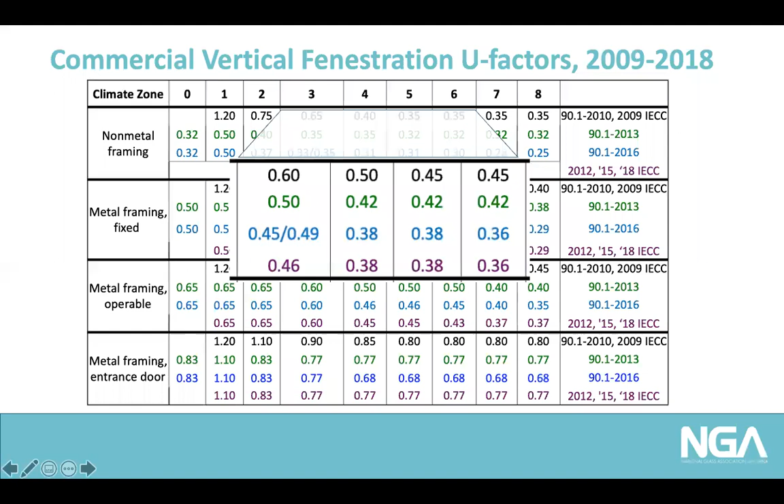And you can see as you go from older to newer, you see a steady increase in stringency, in this case, lowering of U-factors. Not a big surprise. We all know that's happening. And we see that in the real market. As the codes advance and then are adopted by the states, the market adjusts too.

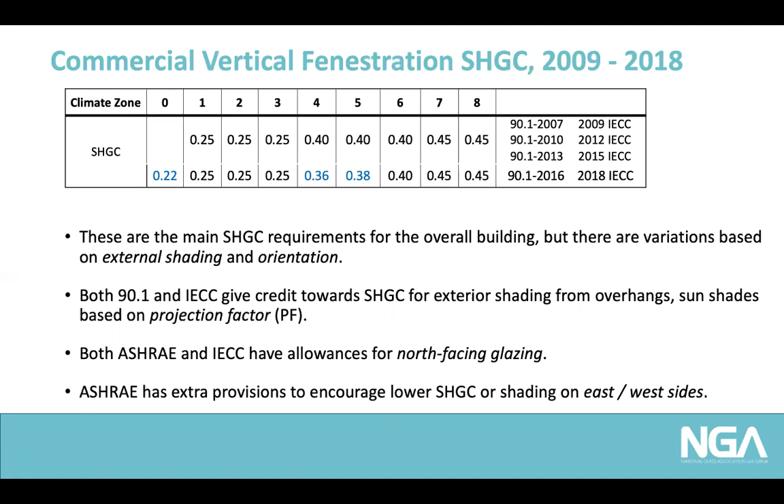Now, in contrast to that, the solar heat gain has stayed pretty consistent. You can see there it's always been at 0.25 in the south, and then higher solar heat gain in the central and north. There were some small revisions made in the center of the country, but really nothing too significant. So solar heat gain has been fairly stable over the last 10 years, and in fact even going back before that. A few new changes coming up on that, which I'll talk about in a minute.

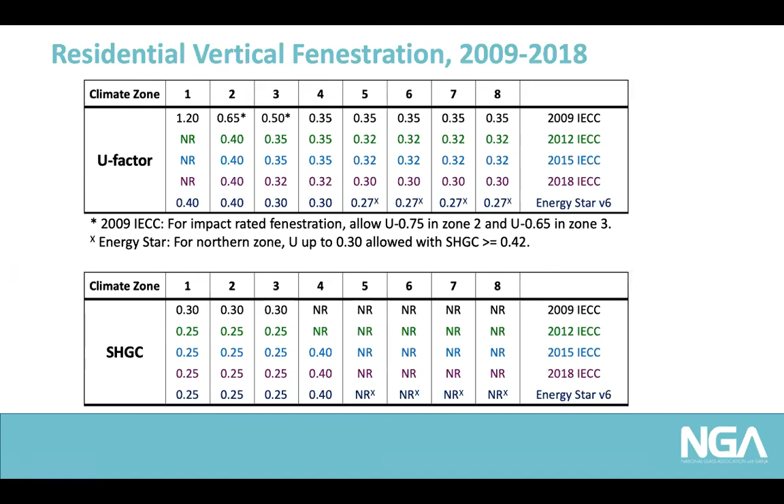That's today's codes. Where I spend the bulk of my time and where I represent the industry and you guys is looking at future codes. What's coming down the road? What are we working on? What's being adopted? And then what'll hit the road 5 years, 10 years from now. I've talked at length before about ASHRAE 90.1. The 2019 version is pretty much done. All the content is done. And it will be published in early October.

And then what is a little new is the 2021 IECC. Even though it's 2021, we're working on it this year. And so we went through the first public hearing this spring, where we went through 11 long days reviewing hundreds and hundreds of proposals, debating and then approving and disapproving and so forth. The next public hearing will be in October, and then there's a final online vote of all the building code officials in the November, December timeframe.

And I'll talk a little bit more detail, but in general, what came out of the IECC preliminary hearing results: the biggest item, which I'll show in a minute, is there was unanimous approval to align the commercial fenestration requirements between the IECC and ASHRAE 90.1. And likewise, the committee disapproved other proposals that went beyond that, or there were some bad proposals like unrealistically applying residential window U-factors to all commercial windows, regardless of structural performance or application. All those got shot down. So really we're trying to align 90.1 with IECC, which is a good thing from an implementation standpoint.

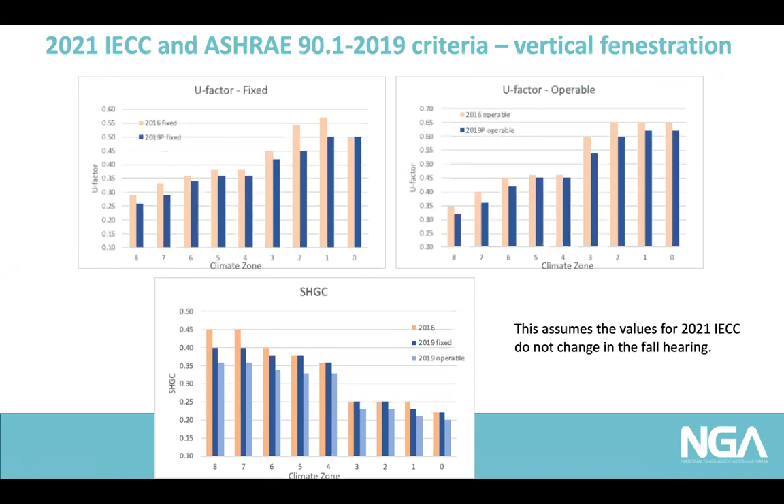And then one thing again with this alignment, and part of a big compromise deal, was that 90.1 and IECC would use the same product categories without regard to frame material type. So this just visually shows you the U-factors and solar heat gain, where you kind of see this next notch in performance in terms of U-factor, and you'll have all these details later when we make the slides available. It's not a huge leap, but a significant and steady incremental improvement in all zones.

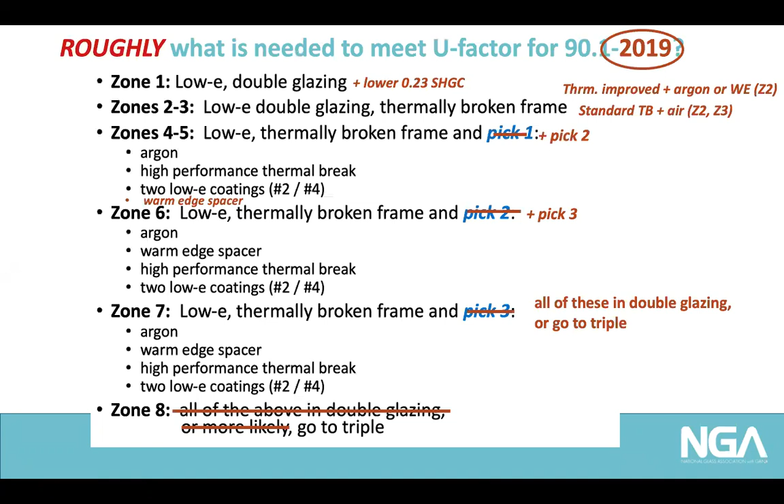So zones 4 and 5. Washington, D.C. is zone 4, and Chicago is zone 5. Generally, if you have low-E, thermally broken frame, and then pick one thing off this list, obviously the easiest being argon, you'll meet the U-factor. That's for 2016. And then as I mentioned, for 2019 ASHRAE 90.1, or what's going into the 2021 IECC, it basically just moves everything. You add one more feature. So in that same zone 4 to 5, now instead of picking one thing, you pick two things. And warm edge spacer is an option in that case too.

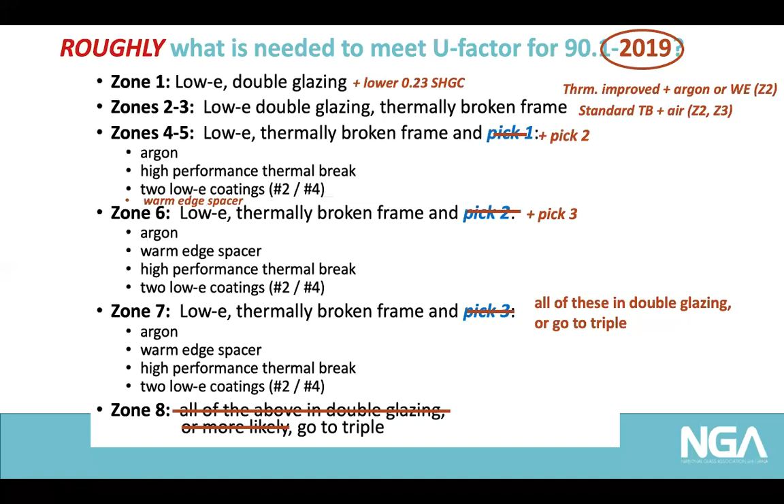So now in Chicago, if you were just doing argon, low-E, standard thermally broken frame, now maybe you're going to add a high performance thermal break or a warm edge spacer or fourth surface coating, but now you pick two things. So that's kind of what I mean by it's a zone shift, which stretches things, but in a realistic, practical manner.

Now, solar heat gain, they did make a change, sort of, and I use that word for a reason. They are now going to include, both in ASHRAE 90.1 and IECC, separate solar heat gain numbers for fixed and operable products. And that's similar to what they already do for U-factor. And they look different. So some people have been looking at, oh, 0.23 solar heat gain in zones 2 and 3. Well, that's for the operable products.

In reality, these numbers were set to use the exact same glazing type. So the only difference is that it's accounting for the higher frame to glass ratio in operable products. So when you get an NFRC type rating, you'll have the exact same glass, but your fixed lites that get a 0.25 will get a 0.23 in an operable window. So it's a way they can capture energy savings on paper or in the performance path, but it doesn't actually require different glazing types in different zones.

So there's really not big changes in solar heat gain coming, with the exception of zone 1, where they did lower it down to 0.23 fixed, 0.21 operable, and that will require these new lower triple silver products or a tint with a low-E as an option. They wanted to do that last cycle.

At that time, I think there's only one company offering them. Now there's multiple companies offering these products, and so they went ahead and made that change. Again, just to start off with zone 1 and zone 0, which is not even in the US, that's like Saudi Arabia and places like that, will use those. Zones 2 and 3 will still kind of be standard triple silvers, or you can go to the lower triple silvers, and then more standard products, but still solar control in the central and north.

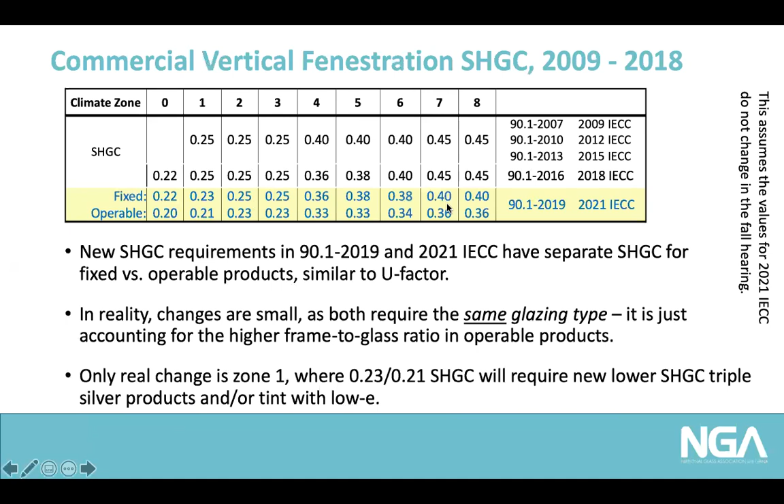On the residential side, there's a lot of debate, goes on for days, about a lot of different items, but not much on fenestration really. Most of it was a debate about performance path compliance paths, envelope backstops, which do involve windows. But when it comes down to the actual prescriptive requirements for fenestration, there are only small changes, which are shown here in blue. They made a few changes in the south, zones 2, 3, and 4 to U factor.

And then they added a new footnote, which applies to anywhere there's a 0.30 U factor. They will allow up to a 0.32 U factor in windborne debris regions or at greater elevation, because you have to put in a breather tube or so forth. All proposed changes to solar heat gain were disapproved, so there are no changes made there. So really, it's not a big deal, with one exception.

Highlighted there in yellow, we see in zone 2, the U factor went beyond Energy Star. Now it's a 0.35, so the products are readily available. So that's not an issue, but it's a conflict with the philosophy that Energy Star should be a notch above code, and that's been our philosophy, it's been EPA's philosophy, so it kind of creates a conflict. So GICC, AAMA, and WDMA are all filing comments to at least rectify this, where the energy code might match Energy Star in some places, like zones 3 and 4, but it wouldn't go beyond Energy Star, because we want to keep that as a notch beyond.

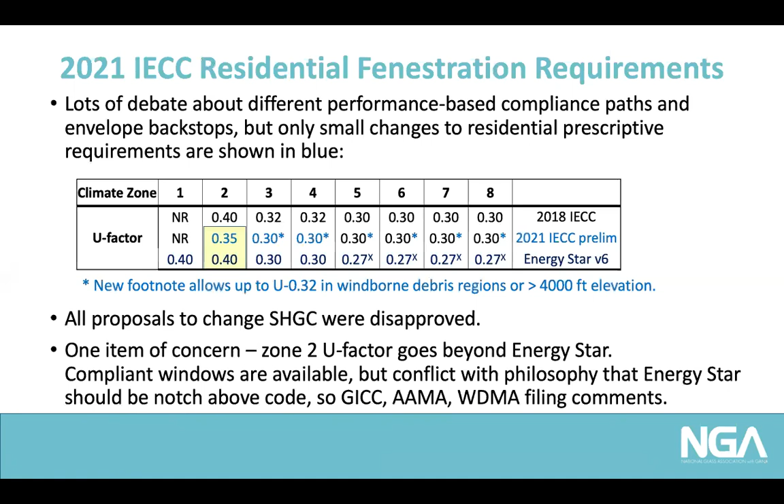Other hot topics at the IECC hearings, air leakage and envelope commissioning. 90.1 has air leakage testing or air barrier inspection. IECC, the preliminary hearings went more aggressive. It's a pretty aggressive committee, and they passed to have both whole building air leakage testing and envelope commissioning in most occupancies. Now think about every commercial building type, from a small fast food restaurant up to a gigantic hotel or convention center. It's a big deal. So to do whole building testing and all those, some are easy, some are hard. And so it's going to be controversial.

I don't know if it'll survive the rest of the process or not, or go back to the way ASHRAE has it, which is do testing or air barrier inspection. But either way, from our industry's viewpoint, especially the glazing contractors, you're going to see continued increased focus on air barrier continuity and the wall and window intersection. So they're going to be looking at those details more closely.

Daylighting, we've worked over the last several code cycles to expand daylighting requirements. So we already have made a huge amount of progress there. And then they're taking additional steps as controls get better and with LED lighting. And so both 90.1 and IECC are going to require better controls, like continuous dimming, not just step controls, and more controls in more spaces.

And what this really means for us, because a lot of it's about the controls, but the more daylighting controls you have, and the better controls you have, that's more daylight savings, and it's more value from having windows. So it helps support having good glazing for views and health and occupancy and well-being, all those aspects, and daylighting. So it's generally very good for us.

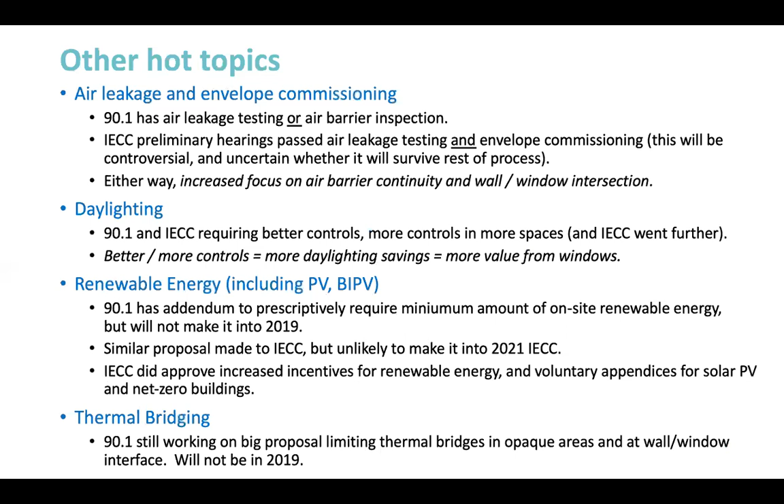It's a big issue because you're getting into detailing, but it's not ready. It's not even close to being ready. So it will not be in the 2019, and it will not be in the IECC, but they are still working on it. And that's a whole topic on its own that we could do a whole other presentation on.

And then I'll talk about Washington State. Didn't have all that big rhetoric, but there's something similar going on there. I guess the message I want to send is just everyone take a chill pill, relax. There are some concerns there. That's the threat that everyone's identified right away, but there's also really big opportunities coming out of this. So I want to talk a little bit about what's actually happening in New York City and Washington State and so forth. But before I get into the details, I wanted to point out, where did some of this come from? It's kind of interesting when you take a step back.

It really comes back to politics in early 2017 when the U.S. administration announced their intention to leave the Paris Climate Accords. All right, you may say that has nothing to do with windows and glazing, but it does, because if you remember, when the current administration announced their intention to pull out of the Paris Climate Accords, there was a big rally from individual cities and states, not just California, but a lot of places, saying, all right, well, we're going to act locally on our own. And now we're starting to see that in the building codes. And so that's where some of this is coming from.

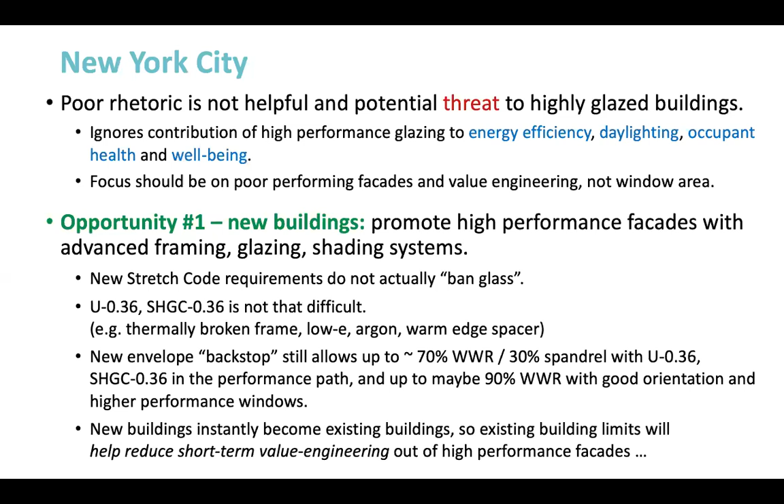And that's going to help reduce short-term value engineering, when people say, all right, I don't want that thermal break, let's take out the argon or the warm edge spacer. This is going to force them to think about not just the new building code compliance, but how does it perform down the road? Because I'm going to have to pay fines if it does not perform well. So that leads to the second opportunity.

What they have written down for existing buildings is going to be a strong opportunity for retrofit, replacing, and even adding glazing, secondary glazing. So there's an overall target. They're doing this for climate reasons. Like I mentioned before, it's to reduce the city's carbon emissions by 40% by 2030. And they have an office that will establish targets by 2023 for existing buildings over 25,000 square feet, excluding low-rise residential and a few other types of buildings.

So then starting 2024, building owners must report their energy usage annually and then pay fines, basically a carbon tax, for exceeding those limits or not reporting. And they're significant, they're big. And they're trying to focus first in 2024 on setting limits that get the 20% most carbon intensive buildings. And then in 2030, set it to cover 75% of the buildings.

So what's that mean for us? It's a very large incentive to upgrade existing buildings, because the easiest competitor to doing something in a building is doing nothing. And now this will suddenly change that. These fines, it is a tax, but it will improve the economics, the ROI on doing envelope retrofits. And so that means glazing and window replacement. It also means secondary glazing systems that are out there. So it could be a big opportunity for us.

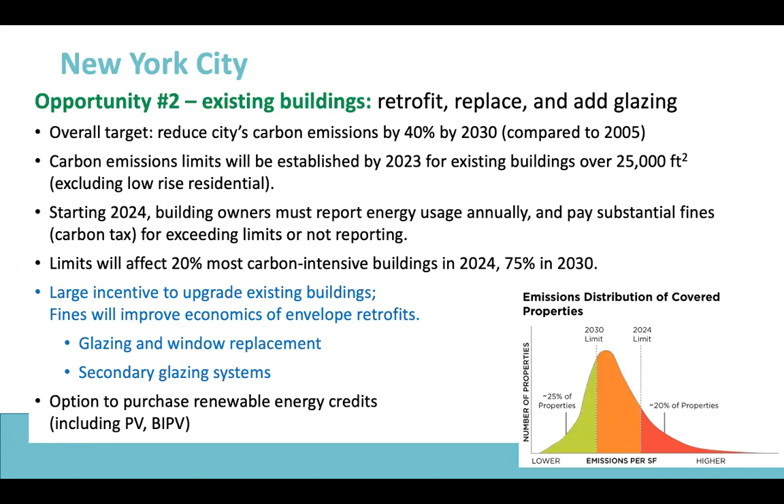And then part of it, there's also an option to purchase renewable energy credits as a way of satisfying this. So that supports our members who also play in the PV and BIPV world. And then lastly, real quick, I just want to talk about Washington State.

This has made the news less, but there was a law that was passed there recently, and it's very similar, and it's based on similar climate change goals and same reasons. When the U.S. as a nation pulled out, a lot of places, including Washington State, said, fine, we're going to do it. They passed a new law, HB 1257, and it sets aggressive targets for reducing building energy use.

The only difference is they're focusing on energy instead of carbon, even though they are doing it based on climate change goals. For new buildings, it's a pretty aggressive target, and it's not just a goal, it's a required target for their building codes. By 2031, reduce energy use by 70%. Right now, the number's not that hard. U of 0.38, solar heat gain 0.38, that's not difficult. But we will have to watch it, because between now and 2031, they could really make big changes.

They do have an envelope backstop that's a little more stringent than New York City, which I don't like, but it is what it is. With daylighting, it allows you up to 51% window to wall ratio in the performance path with the current product, and up to about 70% window to wall ratio if you go down to a very good product, 0.29. So it's a little tighter than New York City, but there's still opportunities there, and it's the opportunity to push high performance glass. And then existing buildings, same thing as New York.

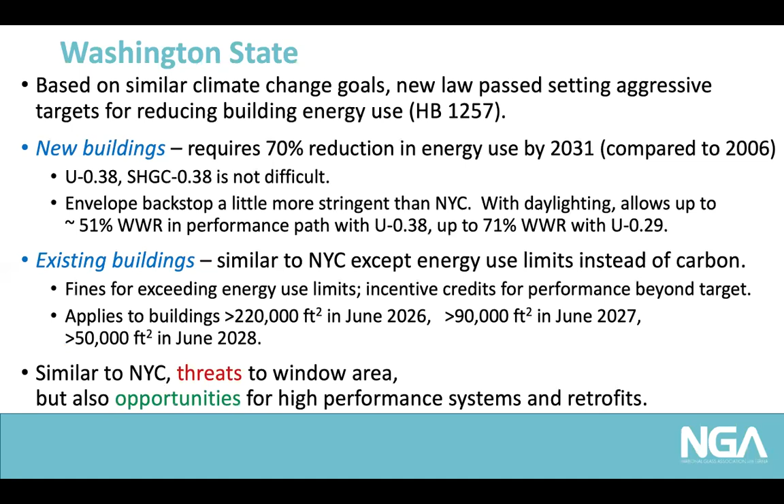So again, similar to New York, there's a threat to window area that we need to watch carefully, but it's an opportunity, and I think our response has to be push high performance systems and retrofits. Don't let them get away with value engineering where possible, or if there is, obviously we want everything to be economic, but make them think long-term when they're looking at the economics, not just at first costs.

So I'll just wrap up with a quote I found kind of interesting from Robert Kennedy. There's a curse which says, may you live in interesting times. And like it or not, we live in interesting times. They are times of danger and uncertainty, but they are also the most creative of any time in the history of mankind. This is from 53 years ago, but I think it still applies in many ways today, so I found that kind of applicable.